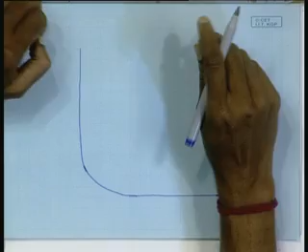Okay, today I thought we will do oil tanker, but I see in the title Ro-Ro ships. So, let us do Ro-Ro ships. Next time we will take up oil tanker. Okay. So, what is this Ro-Ro? Any idea?

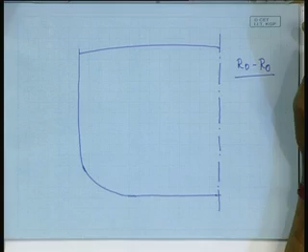Roll on, roll off, right. So, roll on, roll off. Again, that same concept came because automobile is one of the commodities which is very highly traded, right. There are countries which are big producers of these automobile cars and some countries big consumers of automobile cars, like Japan is a big producer and US is a big consumer. So, that is how all this game started. That means they are producing at their own land and exporting to US, right. That is how it all started.

So, again here the cargo is somewhat different, like we have seen cargoes, general cargo, liquid cargo, bulk cargo, containerized cargo. This is an automobile cargo, a cargo which by itself is mobile, it can move of its own, right. So, that very aspect, that the cargo itself can move, has been taken advantage of in designing these vessels. Why? Again that same aspect of loading, unloading, right.

So, here the whole concept is that the cars, the automobiles or the cargo will roll on the vessel, will sail with the cars and at the port of destination it will roll off, right. That is how roll on, roll off. So, what we need for this? We need proper stowage spaces for the cars. We have seen what kind of cargo stowage space is required for general cargo ships, for bulk carrier, for container and now for the cars. These vessels are dedicated for carrying cars only, Ro-Ro vessels. Well, car means automobiles, right.

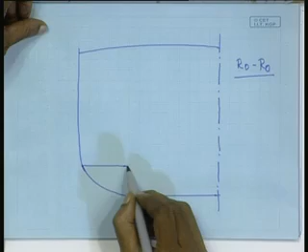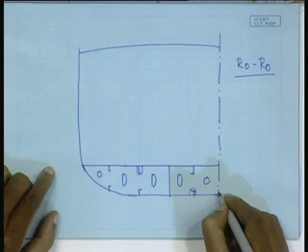Now, before we go for the multi-deck, we draw the basic minimum which is common for all vessels, that means the outside hull and the double bottom, right. Whenever you do a midship section, first draw the outside hull and the double bottom. So, you can immediately do the necessary decoration in the double bottom, like this. This way you indicate that it has a double bottom and you are drawing a section at a plate floor, that is enough. It gives an idea. One side girder I have also added here, right.

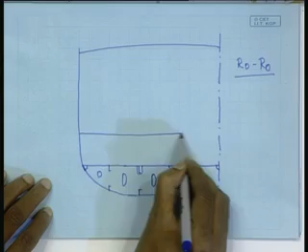So, this is done. Next thing will come from the functional requirement, that it is a multi-decker vessel. So, it will have several decks. A general cargo ship can also be a multi-decker vessel. Generally, it has only one lower deck, can also have two lower decks, but generally not more than that, but here it will be many more. Here we have drawn at least 1, 2, 3 decks below main deck, right. It can be more depending on how much depth you have and how much minimum clearance is needed between two decks.

So, straightaway multi decks, and obviously for these vessels the primary strength requirement is longitudinal strength. So, immediately I can have all the decks longitudinally stiffened, a longitudinal stiffening arrangement for all decks, right. And since it is a closed decker ship, a kind of closed construction, there is no hatch opening. So, obviously, torsional strength is not an issue, is not a problem, right.

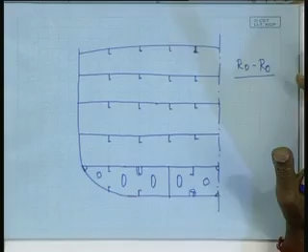So, what you need is proper longitudinal strength as well as transverse strength. Now, transverse strength is also very well achieved because so many decks are already there. Those decks are continuous from port side shell to the starboard side shell. With so many of them, the whole structure becomes really very strong. So, strength wise it is not a big problem, right. Decks are to be made strong enough, because they will sustain all the loads of the wheeled vehicles, right.

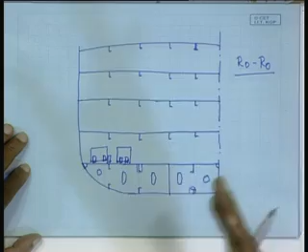Anyway, whatever way you draw, I mean schematically, the vehicles will be there one after another, right. So, its main stiffening arrangement will be longitudinal stiffening for all the decks. Again, by the same logic as the general cargo ship, the side shell will be transversely stiffened, right. That means in the side shell we will use transverse stiffeners, whereas the decks will be longitudinally stiffened.

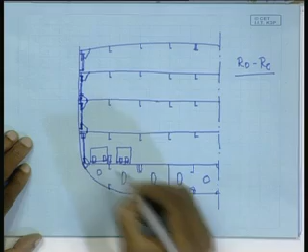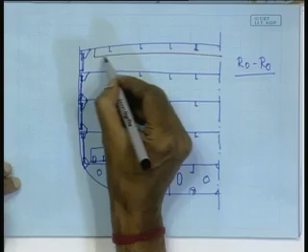Right. So, these will all be bracketed. These are all bracketed, the side shell stiffeners, right. And then again the decks are longitudinally stiffened, which means you have to have transverses at intervals, right, to provide support for those longitudinals. So transverses will be there at every third or fourth frame space like this.

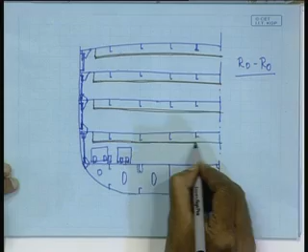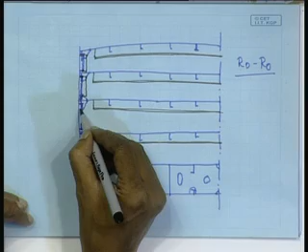Obviously they will be there in all the decks, right. And naturally, once again I am repeating that these transverses will be in the same plane. You will have web frames on the side, frames of higher scantling, right. They will be suitably bracketed and connected, and in the same plane you will have the plate floor like we have drawn. In between, these transverses will not be there, the side shell web frames will not be there, plate floors will not be there either; there will be bracket floors, that concept of bracket floor.

So, what do you see? Every third or fourth frame space you have a kind of ring-like structure. The ring is: you have the deck transverse, this is your deck transverse, right. In the same plane you get the web frame of the side shell. As you come down you have the plate floor, go to the starboard side, again the plate floor continues, web frame, deck transverse. So it is like a ring, and that ring-like structure will be repeated every third or fourth frame space, or as per the classification guidelines.

Okay. So basically this ring-like structure provides support to the longitudinal members both at the decks and at the double bottom, right, and these ring-like structures also provide the necessary transverse strength. So these are the members, stiffeners in the transverse plane, that provide for the transverse strength of the structure. What else provides transverse strength? Which member?

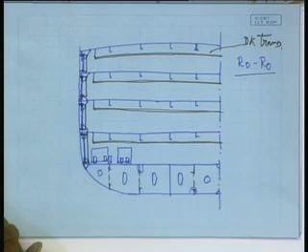So, in general, all longitudinal stiffeners, centre line girders, hatch side girders, side girders in the double bottom, are all stiffening members contributing towards longitudinal strength. And obviously the side shell, bottom shell and deck contribute to both transverse and longitudinal strength. So that is the general layout, or the structural layout, of a ro-ro ship.

So, what we are basically seeing is once again the same thing: you need a structure which is strengthened in all these aspects: longitudinal, transverse, torsional, local. These are the 4 strength requirements to be satisfied so that the ship can sustain the service loads, right. To do that, it is preferable to adopt the longitudinal framing system, because it gives you better buckling strength, and then to satisfy transverse strength you need adequate transverse stiffening members, which we get from the transverses, web frames, floors, and transverse bulkheads, right.

So, how does the loading and unloading take place? Oh yeah, we'll come to that. First, just taking a look at the midship section, how a section at the midship looks like. So, that is how the arrangement is done.

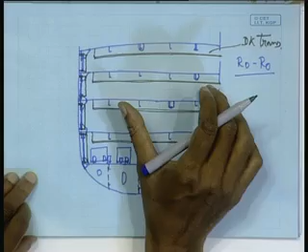Just for the sake of completeness, some of these scallops we are drawing, that means there will be as usual those scallops, right. And it is not only scallop, the detail we have shown you how they are connected, because at the time of fabrication you need that cut opening to fit it, to have the longitudinal passing through that.

But yeah, you have to provide suitable welding of the web and add an additional collar plate, so that you get a proper clamping of that, because we are saying the span is from one support point to the other support point. So, to provide for proper support. So, detail of that we have already seen.

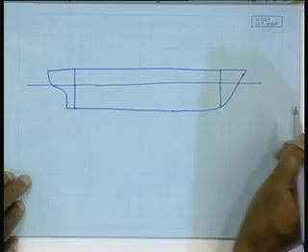So, that is the midship section, and as far as the vessel is concerned, its loading and unloading facilities are something like this. Here there are certain aspects. Well, so we have these 2 bulkheads which are referred to as collision bulkheads, forward peak bulkhead or forward collision bulkhead, aft peak bulkhead or aft collision bulkhead. Anyway, forepeak, aft peak, right?

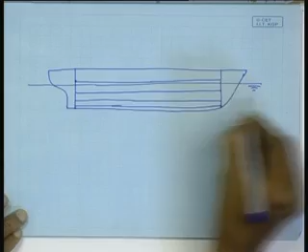Two bulkheads are there, and you have this double bottom, and then we have several decks. I have drawn how many? 1, 2, 3, 4. Okay. This line is the water line I have drawn. Anyway, say there are 4 decks, I mean 3 under decks, 1 double bottom, right? So here the cars are not being carried on the weather deck, the exposed deck, right? They are all carried below the main deck.

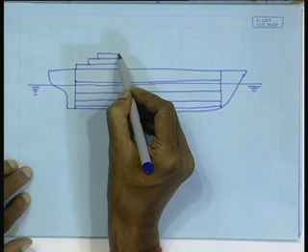So you'll have the superstructure like this, right? And below the main deck, all cars are carried. So what is the entry point, right? So entry generally is from an opening like this, opening at the side. So there is an opening here. Opening means a ramp will be there. The ramp will open up.

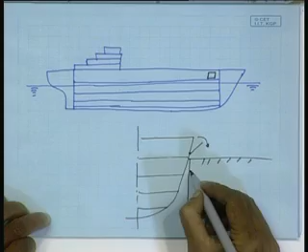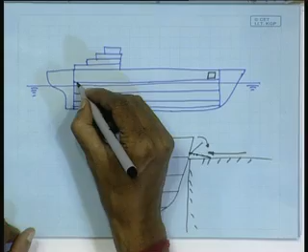So this is my section. So this is the section at this ramp level, right? So here, say it is docked against a berth, right? So the ramp will open up. It opens up like this. So a car can straightaway drive inside through this ramp. So it goes in. Now it travels down, and then you have another ramp here. Ramp is a sloping thing like, well, you may have seen.

Yeah, so only thing at the top, just below the main deck, I mean the weather deck, they are above the water line. The purpose of drawing this water line is that one of the decks, where the ramp is opening up, has to be above the load water line. You cannot keep the ramp immersed in water.

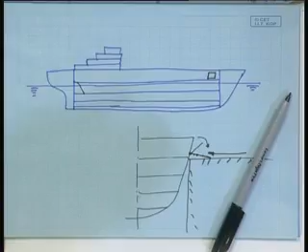Though this ramp, when all cars are loaded, will close up. It will have a properly watertight closing. But if part of it remains under water continuously immersed, it may start leaking. So you cannot afford to have that. That means one of the decks has to be above the load water line. Then only you can have a ramp there, right? Well, so it goes like this. Then again you have another ramp here and a final ramp there.

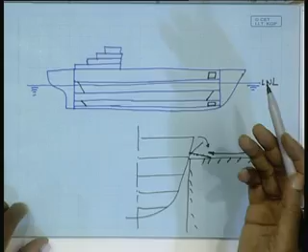So a car can travel down, entering here, it can park. The first car will park itself here at this corner, isn't it? And then gradually go on filling up, because if you park the car right here, then naturally you cannot go. So you will fill up, and the drivers will, of course, come out. If the vessel is like this, then the drivers will leave the car and leave the ship. A fresh set of drivers will come and drive the cars out.

If drivers are to stay on board, then they cannot stay in the car. So then again it becomes a different issue. It becomes almost like a passenger vessel. So that is not very feasible, because a car carrier capacity could be 2000 cars. So if you want to accommodate 2000 drivers, that becomes a problem, right? So generally drivers are not staying. They leave the car and go out.

So that is again another requirement: how the driver will go out. He'll have to simply walk down, right, and come out. Walking down means what? He is walking down through this space.

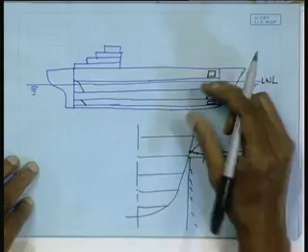There can be some staircase, some provision, but important is that in this enclosed environment you are driving the car, and whatever be your Bharat norms or Euro norms, some emission is there. So a very stringent requirement of ventilation is a must, because otherwise there can be CO accumulation, and when the driver comes down to the last car to board it, he may go unconscious, right.

So one of the typical requirements of this type of vessel is a very stringent ventilation requirement for the cargo hold. In other cargo holds we have seen for other ships, that aspect is not so important. So here is the additional thing. Well, so that is how the cars are loaded. It is generally a side ramp, or at times it also has an arrangement like this.

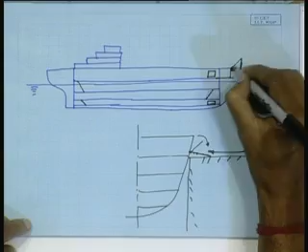An arrangement like this means this forward part opens up. This is not very correctly drawn. What happens is the forward part opens up, almost like opening the mouth. The forward bow lifts up, so you have an entry. So from forward you can enter. That, of course, becomes more difficult construction-wise. It's preferable to have the side ramp.

So the advantage is, generally ships are berthed sidewise and the side ramp opens, you get in. It's easy to say it that way, but imagine a situation: as the cars are getting unloaded, it is floating up, right. So what is happening to this ramp? It will start becoming steeper and steeper. So all those problems have to be solved. Same thing when the vessel is empty and you start putting in the cars, it will gradually come down. So when the first car goes, it will be very steep maybe.

So you will have to have a proper ballasting and deballasting arrangement, because that steepness could be very severe, you won't be able to drive up. It is not feasible, because the draft change could be in meters, not centimeters, several meters, and you cannot make the ramp 100 meters long so that it takes care of that angle. So ballasting and deballasting while loading the cargo, you will have to have proper ballast spaces.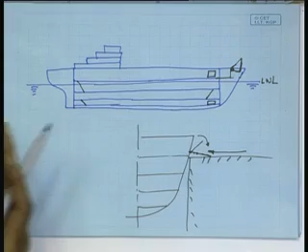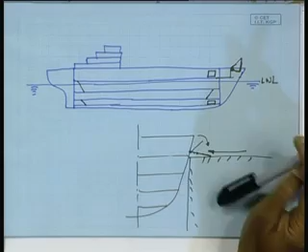Well, as far as the entry for car loading is concerned, the side ramps can be on both sides, port and starboard. So whichever side the vessel berths, it can be entered. Some have forward loading also, this forward ramp, but preferable is the side. Whether it is a side ramp or forward ramp, they should have a proper so-called telltale arrangement. Telltale arrangement means some remote sensing that the ramp door has been properly closed.

Because if you recall, maybe some 5-6 years back, or maybe a little more, one such ro-ro ship sank in the harbor itself. It was fully loaded and supposed to sail the next morning, and they found it already half immersed. What happened was a stupid reason: the cars were loaded, and the ramp was not properly closed.

The water tightness was not there, though it is supposed to be above water. But probably that was a little stormy night, so there were a lot of waves even in the harbor. So water started getting in.

A good part of the ramp remained open, so that with every wave splashing on the hull, some water is going in. And for any ship, taking in water is the most dangerous thing, because taking in water means it becomes more prone to take more water; taking in water means sinking, also generating some free surface somewhere, so stability may get affected. So if it takes in water, it will take more water, which means it's doomed basically. So that's what happened, and it sank.

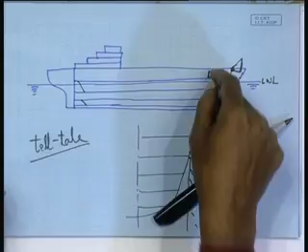In all probability, there was no mechanism of checking from the wheelhouse whether the door was properly closed or not, though these are very simple devices. So now this is a must, that you have to have a telltale arrangement to check that it is properly locked and watertight closed, otherwise there can be catastrophic damage. So that is what it is, and there is another aspect in it.

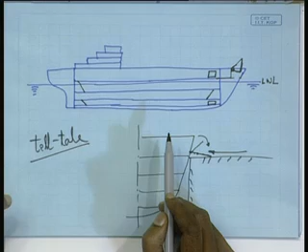Can you see from this how it appears different from other vessels? Because I had been telling you that structural arrangement is done based on two aspects to be satisfied. One is the structural soundness, strength requirement, etc. Another is functional requirement. These two are to be properly balanced. And secondary, you have to keep in mind the production point of view. The arrangement should be such that I can produce it easily.

The arrangement should be such that it can be better maintained. So those things are also there. But at this moment, we are primarily bothered with functional requirement and structural soundness, strength requirement. So here, another typical functional requirement is unobstructed movement of the cargo. Bulkhead. Yeah, the transverse bulkhead I have not drawn.

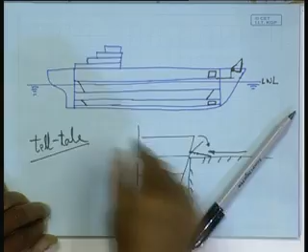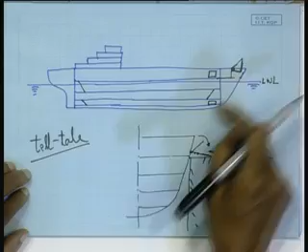Whenever you draw a midship section, you draw the outer hull and the double bottom, because that is more or less a must. In a bulk carrier the double bottom is a little different, it's shorter maybe, because the other part becomes a hopper tank, but it remains. Similarly, whenever you draw the profile, you draw the main deck and immediately put the bulkheads and a double bottom. This is the basic minimum. But here I have given the double bottom, but the bulkhead I have not drawn yet. So this is one aspect.

From functional requirement, in a container ship we have seen the main deck is virtually totally open, so that there is efficient loading and unloading. Here, for efficient loading and unloading, I cannot have any obstruction in between. So then it becomes a very dangerous vessel, and that's what happened. The vessel which sank takes in water, and water fills up the entire vessel. If the bulkheads were there, then only one compartment would be flooded.

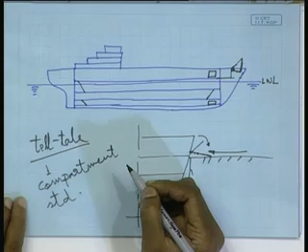The vessels are designed keeping in mind something called compartment standard, right? Have you heard this term anywhere? Not yet, probably. One compartment standard, two compartment standard, or three compartment standard. What does this mean? Two adjacent compartments, not one in the forward and one in the aft. That means if two adjacent compartments are filled up with water, totally accessible to water, they are no more contributing towards buoyancy.

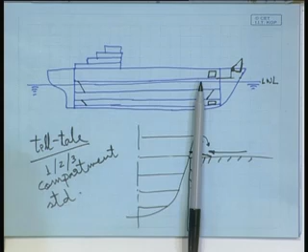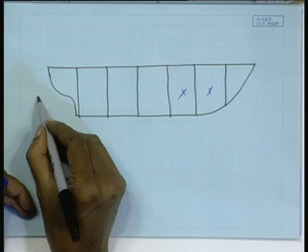So if it is a two compartment standard, with two adjacent compartments fully flooded, the vessel's main deck will not go below water. Not only main deck, theoretically there is a... let me draw it, it's better. So this is my main deck. Suppose I am purposely drawing very closely spaced bulkheads, and let us assume that these two holds have got damaged. So what will happen? The vessel will trim like this, isn't it?

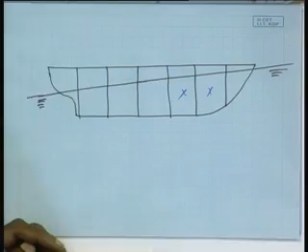This is one thing very interesting in naval architecture. We trim the water plane instead of the vessel. We say the vessel is heeling, but actually we keep the vessel upright and put the water plane at an angle. It's all relative, and that's the easier way it is done. So what is happening? The vessel is essentially trimming by forward, because these two compartments are no more contributing towards buoyancy.

Instead, it is behaving as if it is adding weight to the vessel, right, in the forend. So, more weight in the forend means the forend sinks further. So, that is how we have two methods of calculating this. One is called the lost buoyancy method, another is called the added weight method of calculating what will happen in flooded condition, what will be the damage stability condition, right, all those things you will do.

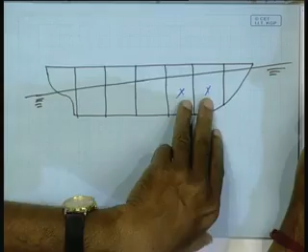So, the two compartments being damaged may mean either they are not contributing to buoyancy. If you go by that route, I call it a method of lost buoyancy, or if I go by the other route, I consider them to be added weight to the ship. So, it is sinking. So, that is the added weight method.

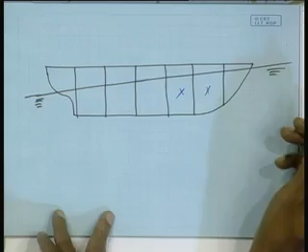Anyway, so it will float like this, and this water line should not immerse the deck. Not only that, the propeller should also be on. No, propeller, well, can't be helped, whatever happens. When a ship has got damaged, you bother about the safety of life, right, such that life is not at stake.

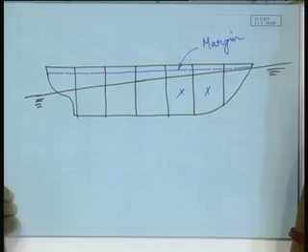So, it is said that if it is a two compartment vessel, then the vessel will heel, trim, everything will happen, but the final water line will remain tangential to an imaginary line called the margin line. This is my margin line. What is that margin line? An imaginary line below the main deck line at side. How much below? Well, I do not remember, all those things you will learn probably in your safety and stability class, but something below. That is why the name is margin.

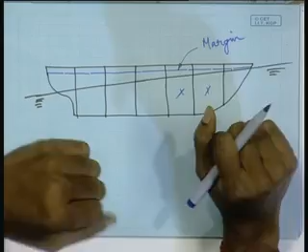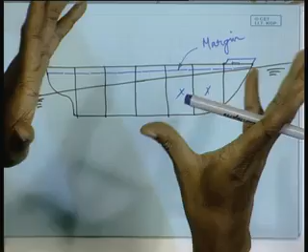That means still that much margin of safety you are having, because the moment the deck gets immersed, it becomes very much vulnerable. Deck immersed means there can be some access manhole on the deck which is more or less flush, or you do not know how much of the deck is getting immersed, there is a hatch opening, or say here, you have the forecastle like this, right? Here the chain locker opening is there. So if the deck is immersed, water will start getting in; there can be some leakage points. Worst is the hatch coaming.

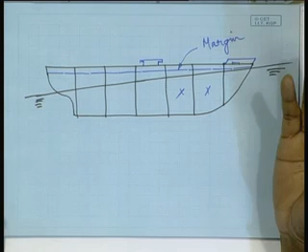You have those hatch coamings that have a minimum mandatory height of 600 millimeters. There may be a case that though the hatch cover is there, part of the hatch cover is getting immersed, and water may leak in. In any case, you are not taking any chance. That means the deck should remain dry. That is the idea. So it should remain tangential to the margin line. So that is the two compartment standard. If three compartments get flooded and it also does not go beyond the margin line, it is the three compartment standard. So that is how safety works.

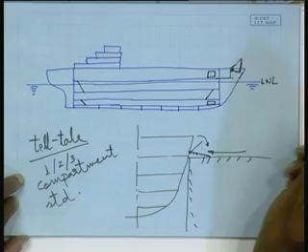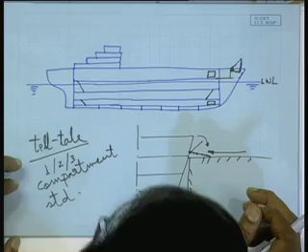Now in case of a ro-ro ship, if any damage takes place here, the entire vessel gets flooded. So you do not have any safety margin, right? So what to do? Till previously it used to be like this. Only subdivision was in the double bottom. If the double bottom is ruptured, the flooding is controlled, it remains confined, but not above. Any damage above, the vessel gets flooded, right? Possibly that vessel which sank, I have forgotten the name, did not have any bulkhead, I believe.

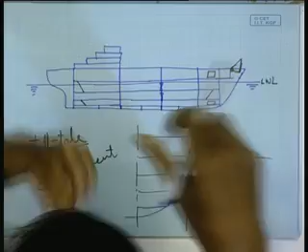But now I think it has become mandatory, I am not very sure, but I believe it is mandatory to have bulkheads. You will have to have bulkheads. You will have big watertight doors. So life has become difficult, simple as that. It was very convenient for loading and unloading, but now there will be huge hydraulically operated doors in each deck, because manually you probably cannot handle them. So things have become more complicated, essentially for safety.

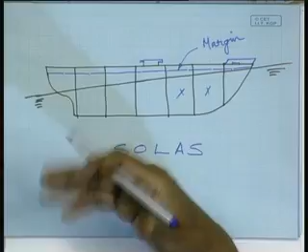Safety of whom? Not actually for cargo. What is that? You have heard something? Safety of life at sea, yes. So from that it's called SOLAS. There are SOLAS conventions, they have them every year or something like that. Safety of life at sea, that is what is important. So all these evolutions first started through SOLAS, safety of life at sea, and after that another aspect has become important. What is next more important? Environment, right? So what is that from? Marine pollution.

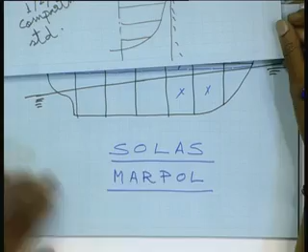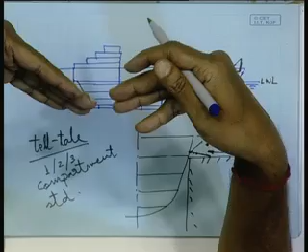So that has taken this form, MARPOL convention. They are the two important conventions. MARPOL convention, marine pollution. So from this marine pollution, actually you have changes in design of oil tankers, right? There you will have to have cellular, we were talking about cellular construction yesterday. First it started with, it should have a double, we will talk about oil tanker, then we will see. So there the marine pollution, this MARPOL convention has made a whole lot of changes in the design of oil tankers, right? And then even ballast water management has come now in effect.

So here can't we seal the different floors? No, the thing is like this. I mean, what the safety aspect was in this fashion, that either you will have to seal. By sealing you mean that entire deck space, if it gets flooded, the one deck space gets flooded. That means this ramp, this horizontal, there you will have to have a mechanism of having a hatch cover or something and close it. Feasible.

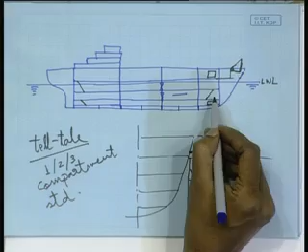But there what happens, there will be a parallel sinkage, because you are not sure if in one zone a defect is taking place or a damage, then well, this much is getting flooded. So that remains to be seen, how much parallel sinkage it will give. And then, you are closing this, but again the same issue here also with the bulkhead door closing, that they will be exposed to water. So there can be leakage, but once an accident has taken place it will try to go to the nearest port immediately. That is always there. So that could be one way.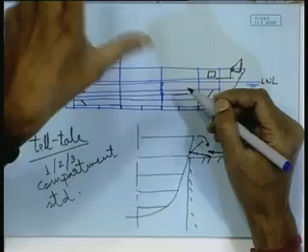But in case of an accident, it rips through two. Yeah. Actually, what happens here is that this space, the volume is much bigger than one hold in the transverse plane, right? That is one aspect. Other aspect is that by providing bulkheads, I am not only making them safer, but also from the strength point of view it is helping the transverse strength, though it gives me good transverse strength in this arrangement.

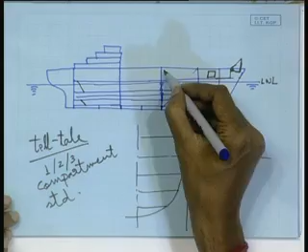But anyway, probably that is one of the aspects that it eventually came to, that you divided it with transverse bulkheads. One of the reasons could be that the volume occupied by one hold, so-called hold between two bulkheads, for one damage, will be less compared to the whole deck space from the forward end to the aft. So what we have now is the bulkhead with big openings with suitable means of closing. That is how it has been taken care of. So that is the ro-ro ship.

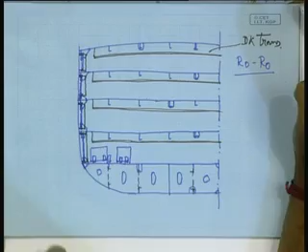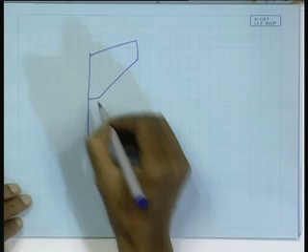Well, another specific aspect of ro-ro ship is, like in bulk carrier, there is as such no concept of securing the cargo. In a bulk carrier, you only load the cargo and at destination you unload it. At best, what is done is, we are just going a little bit back to the case of bulk carrier. Whenever you draw, try to be as proportionate as possible and maintain the basic things. Basic things means generally they are in one line, this plate and this plate, right, they are in one line.

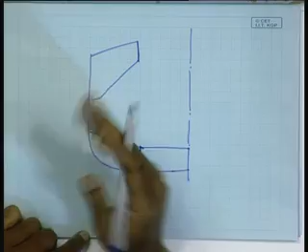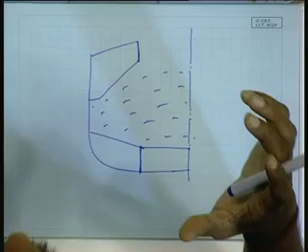Anyway, in this bulk carrier, this is the basic configuration of the hull. Now you have the cargo. It may be the case that the hold is not fully loaded. You are carrying, say, wheat, and you meet stormy weather, the vessel is rolling. So there can be a possibility of a little bit of cargo shifting, right? Yeah, cargo shifting is possible. If the cargo shifts too much to the port side, then when it is oscillating back, not necessarily the whole cargo will come back. So it may remain in a heeled condition, right?

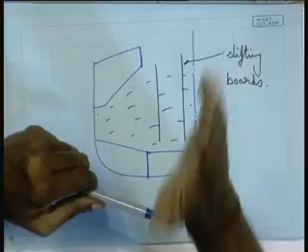So what to do against that? Not much can be done. There is something called, some boards are put inside, just loosely they are put inside. They are referred to as shifting boards. Shifting boards, it somewhat prevents easy movement of the cargo. So, thereby you are somewhat obstructing the movement of that cargo, because that is needed, otherwise it will remain in the heeled condition, then your maneuvering will become difficult, the vessel maneuvering problem.

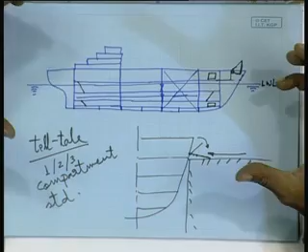Similarly, in the ro-ro ship, there is another aspect: here the cargo, that means those vehicles, will have to have a mechanism of locking the wheels, because otherwise you cannot put a chain and lock the car. The car you cannot damage, because these are brand new cars going to the market, and if it is dented, scratched, or damaged, nobody will buy.

So, there is a mechanism: it will drive in and the wheel locks will come up and jam all the 4 wheels. So, through that it will hold. Those are additional features needed in these vessels. Similarly, in container ships, which we were talking about yesterday, this is for your information.

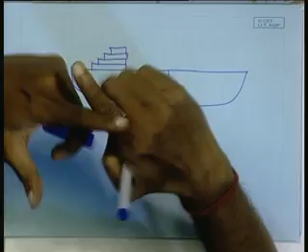The containers in the hold are okay, things are fine there, because they are self-locking type. You put one container on top of another, they lock themselves. There are some openings where a pin goes in, self-locking, and they are stacked in the hold one after another, closely spaced. All those dimensions, like the gap between the containers, are taken into account, and a proper lashing arrangement is to be provided.

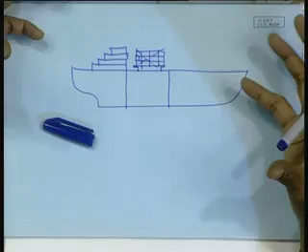That becomes more critical when we talk about the containers over the deck, the containers exposed. Some lashing mechanism has to be there to keep them secured, because the vessel may roll, and above the hatch they will experience more acceleration, because they are away from the center of gravity and it is oscillating.

So, there are cases of containers getting washed away, because you meet real rough weather, huge waves hitting the ship, and all this lashing will not work. Those are accidents you can't help; containers get washed away. Taking this advantage, that is the other side of the picture, some unload it deep at sea, claim it has been washed away and claim insurance. This is the unfair thing.

So these days people are trying to track container movement. Very interesting problem, tracking a container. You are sending your container, and sitting here, you want to track where it is continuously out at sea. How can you do that? GPS, fine. What will GPS do? The container will not hold a GPS.

Essentially through GPS you know the position of the ship, but how do you say this particular container is yours, whether it is getting offloaded at mid sea or really getting washed out by a storm, or even at the port of destination it is sent somewhere else? So, there is something called RFID. You have heard about this? Radio frequency identification.

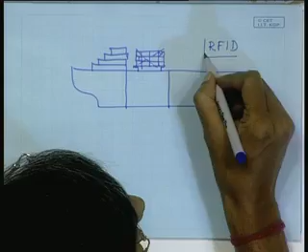Such techniques people are trying to use with the help of satellites. You have your own RFID embedded in the container, which will keep sending signals to the satellite, from where you retrieve it and know what is happening to your container. This is not yet done that way, but probably that is one way to keep track, because these are also important.

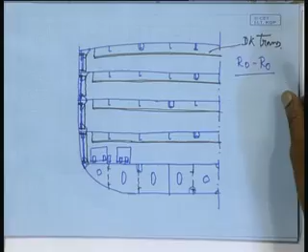So, that is how we see that the ro-ro ship's specific features are that it is a multi-decker ship, with longitudinally stiffened decks, and the side shell transversely stiffened. Another specific requirement is a stringent ventilation arrangement. What are we doing for ventilation? You will have to have proper forced ventilation. That means ventilation ducting would be there in the entire cargo region.

In other vessels, there is no ventilation arrangement as such. In oil tankers some kind of ventilation is there, but bulk carriers have no elaborate ventilation arrangement, while here it will be elaborate mechanical forced ventilation. And for cargo loading and unloading, it's a closed ship, because there is no question of cargo hatch opening. So, there is not much problem of torsional strength.

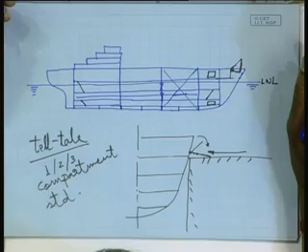Loading and unloading is through ramps, either side loading or front loading, and it should have a proper telltale arrangement to ensure they are perfectly closed. And though unobstructed movement of the cargo used to be a requirement, transverse bulkheads are needed, so bulkheads with huge hydraulically operated watertight doors are to be provided.

Okay, so we stop here. We will take up the oil tanker in the next class.